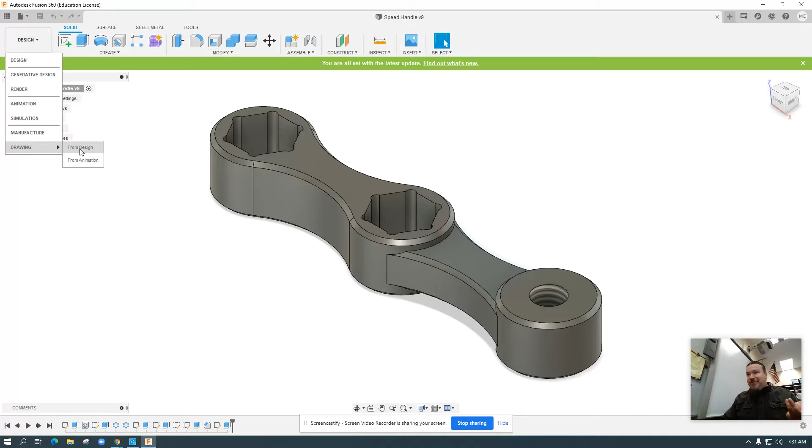Now, if your part is finished, this is actually a pretty easy thing to do, all right? So up here in the corner where the design module is and where the manufacture module is, there's also one called drawing, okay? You want to do drawing from design, because this is clearly not an animation, right? So it's a design. It opens up this tab right here.

Full assembly would communicate that you're trying to do all the parts that you can see. And we want to do all the parts that we can see. We want to do a new drawing, from scratch template. We'll probably bring in a template later.

Okay, now size is critical here. All right, we want this to be the size of a standard sheet of paper. It's just easier to work with. It's easier to print, it's easier to process.

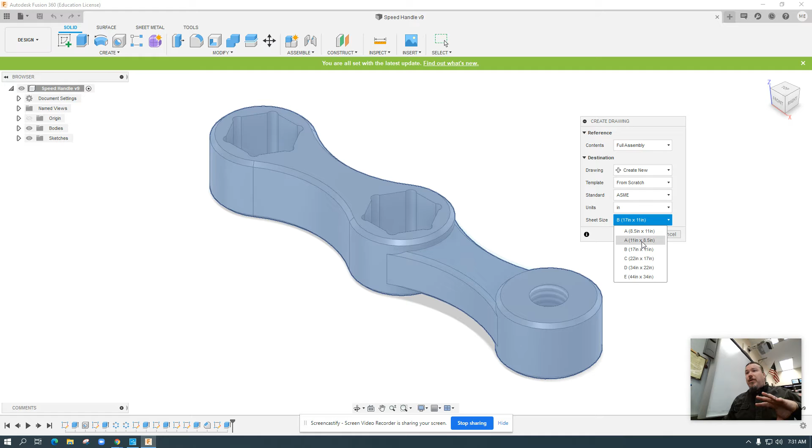Okay, so we don't want B size. That's 11 by 17, that's twice the size of a standard sheet of paper. What we want is the second one right here, 11 inches wide by 8.5 tall. If we do the first one, we wind up with a hamburger instead of a hot dog orientation.

So I click OK, that should punch me through to here. Now you can see here we have a drawing started. Okay, there's a title block. There's no tolerances or anything like that, but it's basically there.

I've got this great little drawing view thing here, okay? And you'll notice what I'm dragging around right now is a view of my part, okay? So a couple of things. First of all, you can pick which view you use, right? Right now it's trying to do the front view for my first view.

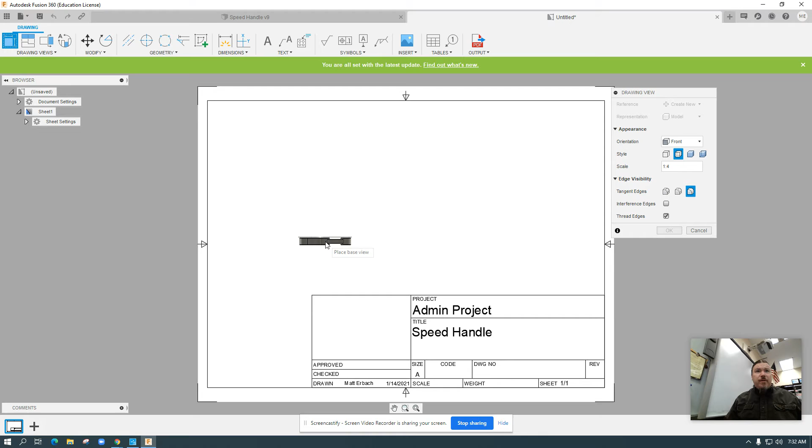I'm trying to remember how I did this. All right, so I think what I had classified as the top should be down here like this. But I also need to bump my scale up, so I'm going to change this to 1 to 1.

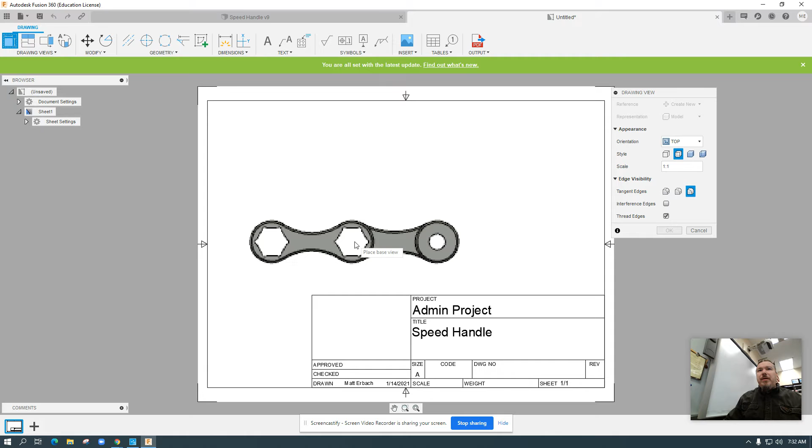Okay, showing me a much bigger version of it. So I want that one there. And I hit OK, and you'll notice it drops a version of that down there.

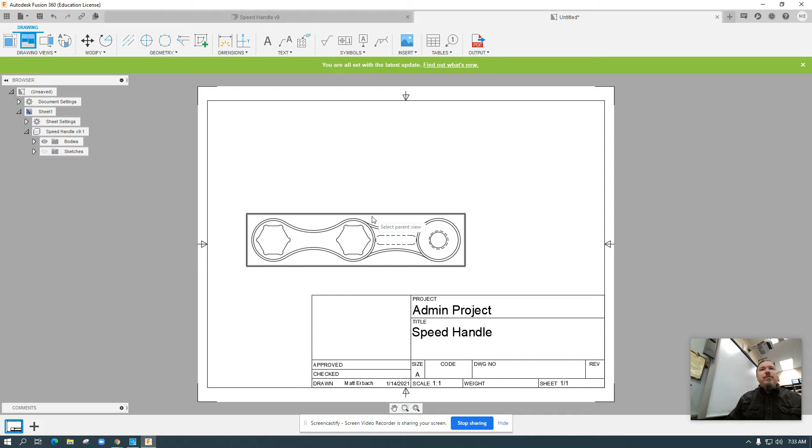Okay, after that, on the drawing, I had a projected view. So up here, right next to base view - this is the base view, by the way - there is a thing called projected view. If I click on projected view and I say I want to project this and I want to do a side view, it automatically figures out a side view.

If I want to do an end view, it automatically figures out an end view. And obviously this is the third one, this is the isometric, the little 3D view. Hit OK, boom, I got all of them. All right, it needs some tweaks, but the basics are now here.

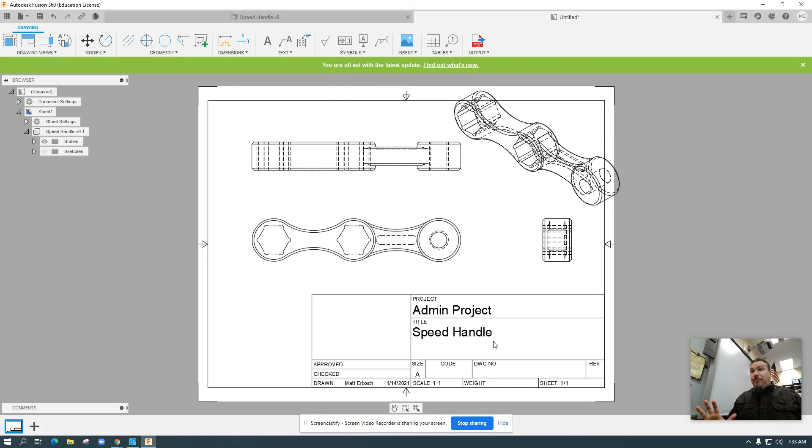So what you're going to do here then is you're going to start dropping dimensions in this bad boy, okay? And use your print as a reference, all right? So I can come in here and I can hit the dimension key.

By the way, the dimension key is right here. And then I can, for example, touch on here, drag off to the side, and it gives me a radius of 0.58. It's supposed to say 0.575.

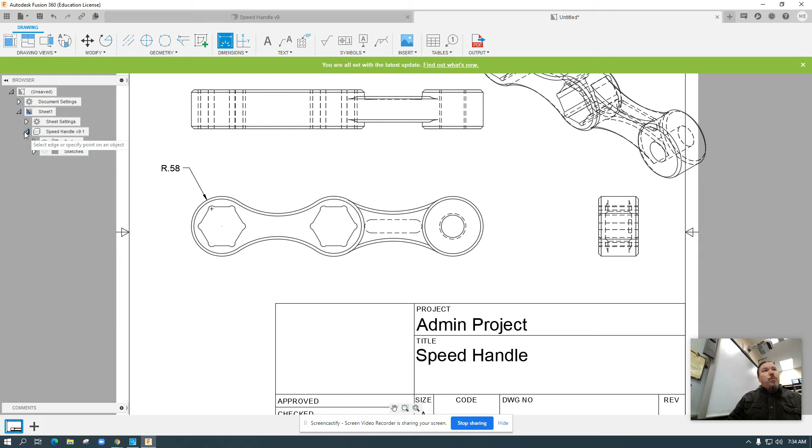It's rounding right now, so what I need to do is go into, I think it's document settings... precision. And we want to turn the precision up to 3 decimals. We hit OK, now all of a sudden it says 0.575, just like the original print.

Some other sizes - I can, for example, click the dimension key, click the center point of this circle, and the center point of this circle, pull up, and get the size between those two center points on those hexes. I could do the same thing, obviously. Oh, I don't want to chain anything.

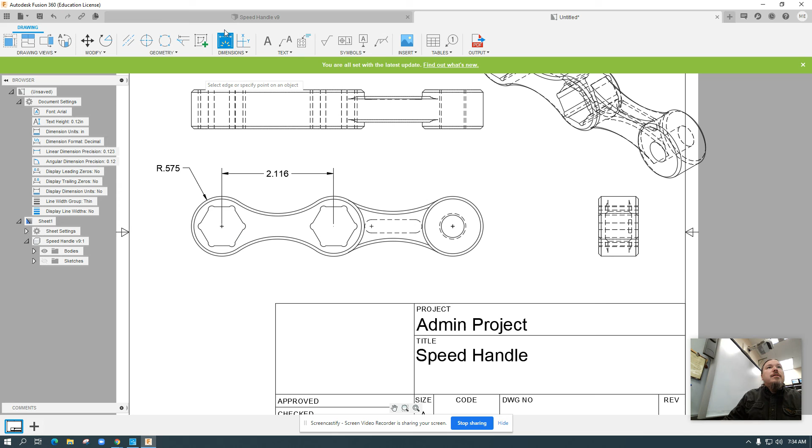I could select here and select here and get a bigger size. Okay, this system allows me to basically document anything I need.

All right, if I click on - got to pay attention to which one you click on, because I clicked on the wrong one there. Don't worry about it, none of these are dimensioned by the inside of the chamfer. They're always dimensioned by the outside of the chamfer.

But basically, just within here, there's a few things that allow you to do stuff. Now, if you want to put a center point somewhere, there is a center mark feature. You can actually take this and you can click on a circle and it puts little crosshairs there, which is really, really...